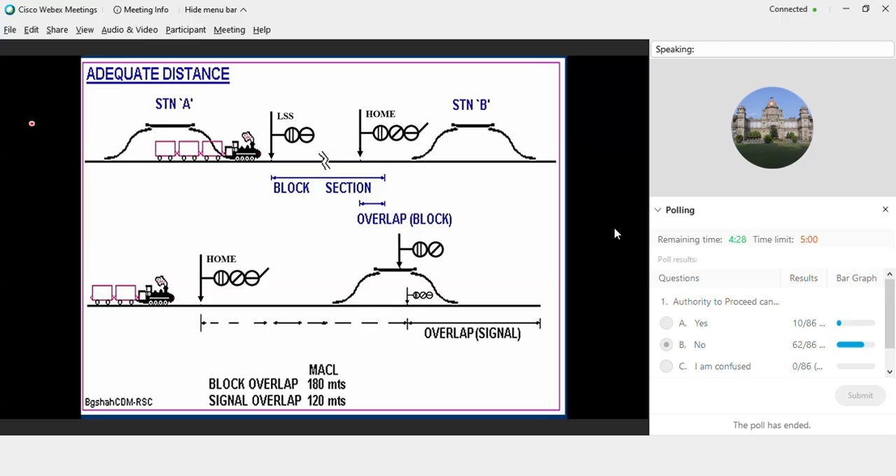to signal. So in that case, the speed is not that much, so the overlap is small. So the signal overlap will always be less than the block overlap. Here is another way of showing it, and there is a small difference in the way the signal overlap is shown in the double line as well as in single line.

In the double line, the signal overlap is from starter to advanced starter. Starter to advanced starter is the signal overlap in case of double line. In case of single line, it is from the outermost point to the advanced starter. This is the difference in the two overlaps.

So, in case of single line, the distance available with the train is much more as compared to the double line. As you can see, the margin available with the train in single line is from outermost trailing point to advanced starter. Now this is signal overlap, so obviously this is 120 meters. So 120 meters plus the length from starter to this point. So it may be around 180, 190 meters.

Whereas in case of double line, it is from the starter to advanced starter, so it is typically 120 meters and not more than that. So there is a difference in the single line and double line.

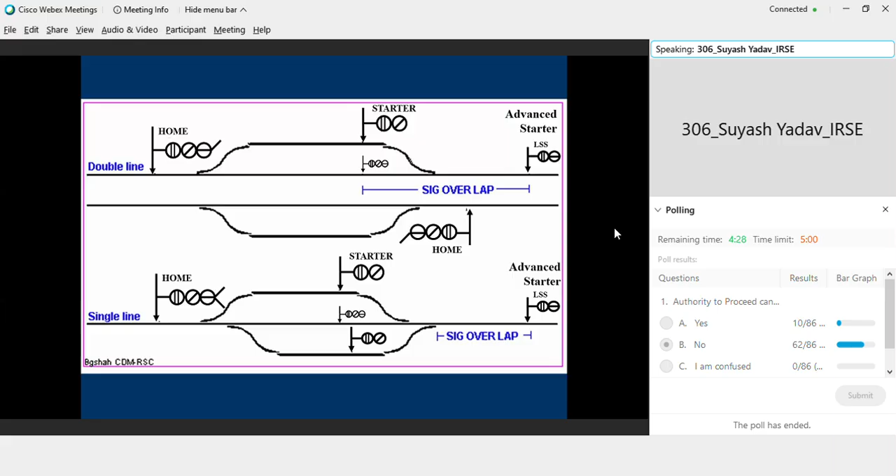Excuse me, so the way... yeah, sir. The signal overlap is from the point to the advanced starter, from starter to advanced starter? In case of double line, it is from starter to advanced starter. But in case of single line, it is from the outermost trailing point to the advanced starter. Thank you. Now the outermost trailing point will be at a distance from the starter signal, so it is always more than 120 meters in case of single line.

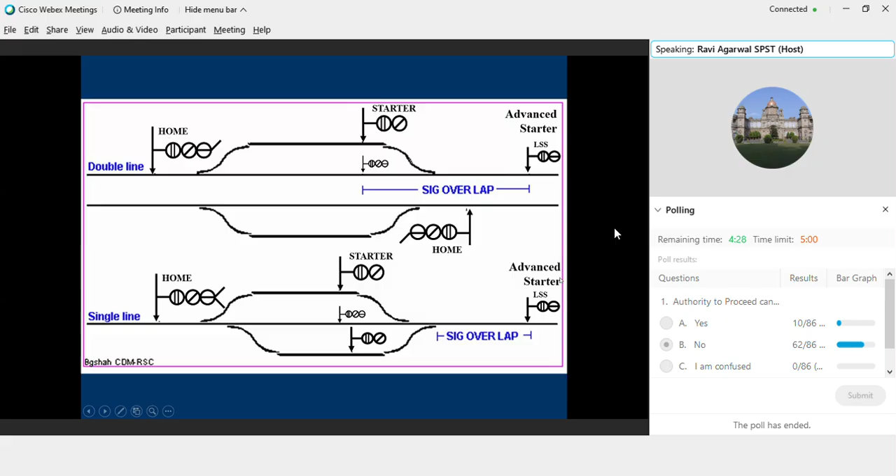Is it okay? Okay, then we'll move ahead. There is a question, I think, so let me try.

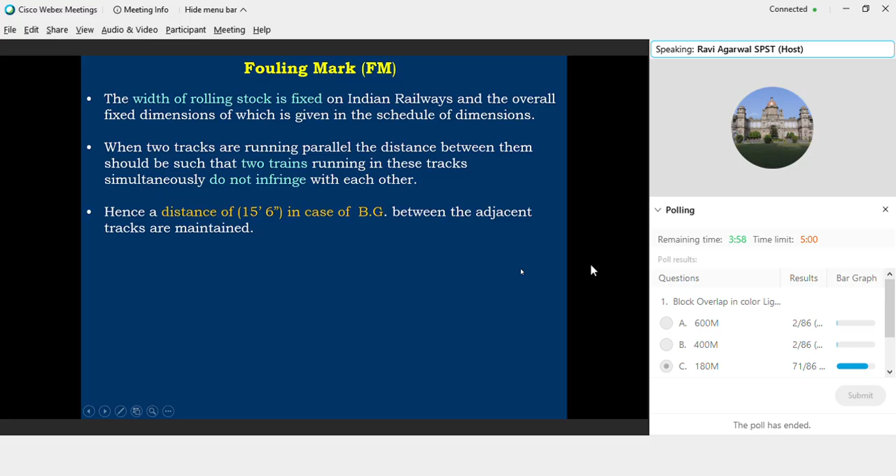Now, most of the places we have broad gauge; the meter gauge is almost eliminated. But in case of meter gauge, the distance is 13 feet. But nowadays we use the 15 feet 6 inches because most of the sections have the broad gauge.

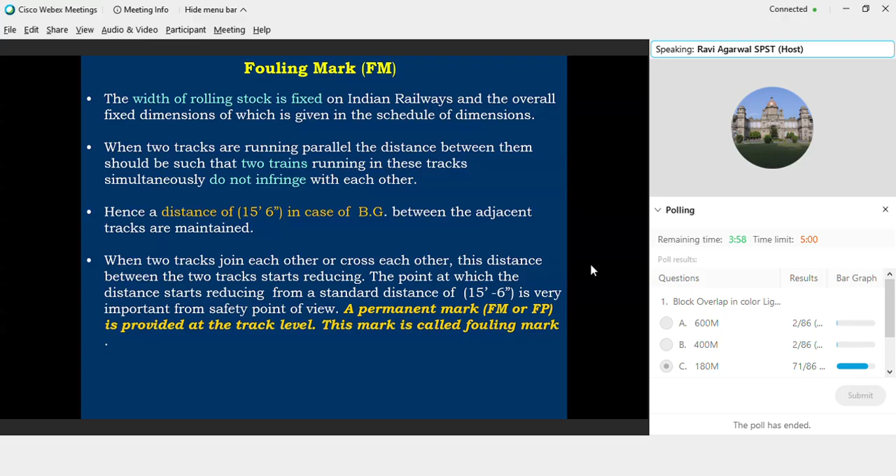So a permanent mark is fixed in the track at this location where the distance between the two tracks is getting lesser than 15 feet 6 inches, to indicate to the driver as well as to the guard of the train that this is the fouling mark, and beyond this point there is an infringement to the other line.

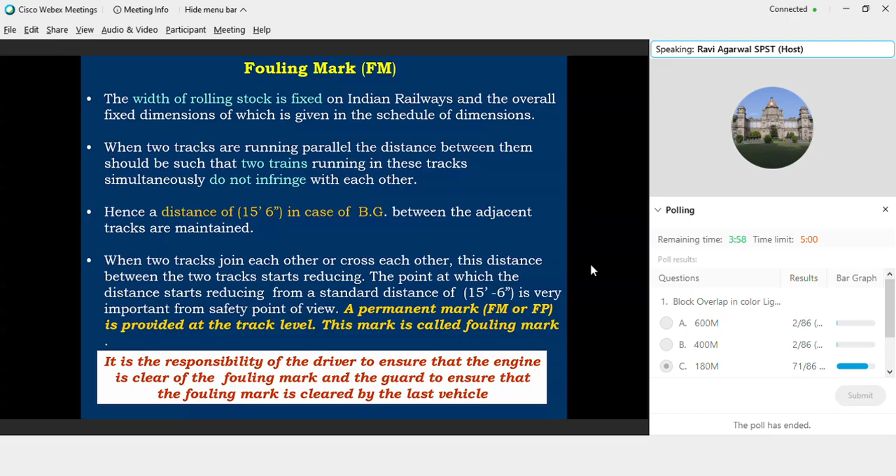So it is for the driver to ensure that the train is standing clear of the fouling mark on the front side, and the guard is to ensure that the train is standing clear of the fouling mark on the rear side. This is how fouling marks are shown on railways, and on railways the full word fouling mark is generally not used, and only the FM which is written is treated as the fouling mark.

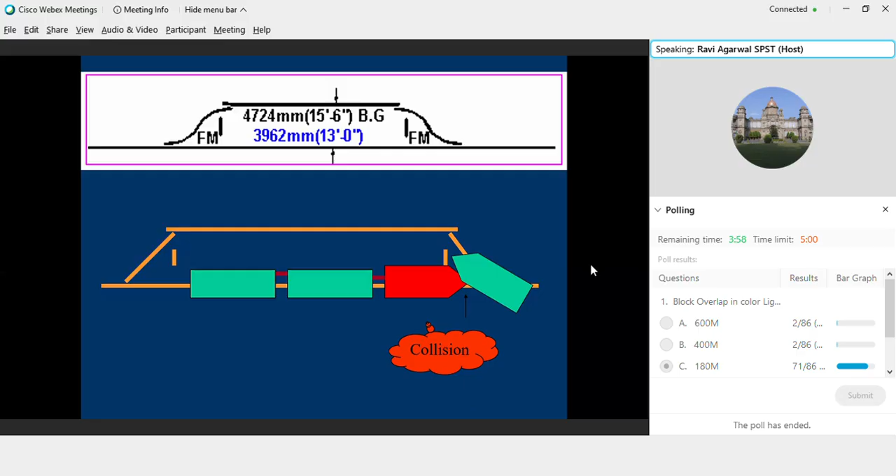Now, suppose a train comes and is standing like this. On the front side, the train is standing away from the fouling mark. The two straight lines shown between the two tracks, the line portion is the fouling mark. So the train is standing there on the main line without clearing the fouling mark in the front, and if the other train passes, because the clearance is not available, there will be some side collision.

Now, in this case, the train in the rear has not cleared the fouling mark, and so similarly, the movement in this way will cause the side collision. And if the train has come in this way, which is clear of the fouling mark on the front side as well as on the rear side, there is absolutely no problem in running of trains on the other line.

So the distance between the two fouling marks is typically also known as clear standing room. It is the room in which a train can stand and is clear from the adjoining line. So this is also typically known as the clear standing room. And nowadays the clear standing room is 715 meters. If it is not observed properly, then this type of collision will result.

And the question for you is, किसकी गलती है, who is at fault, either the driver or the station master? So you may kindly pick up your chat box and write whether it is the mistake of the driver or the mistake of the station master. Please write in the chat box.

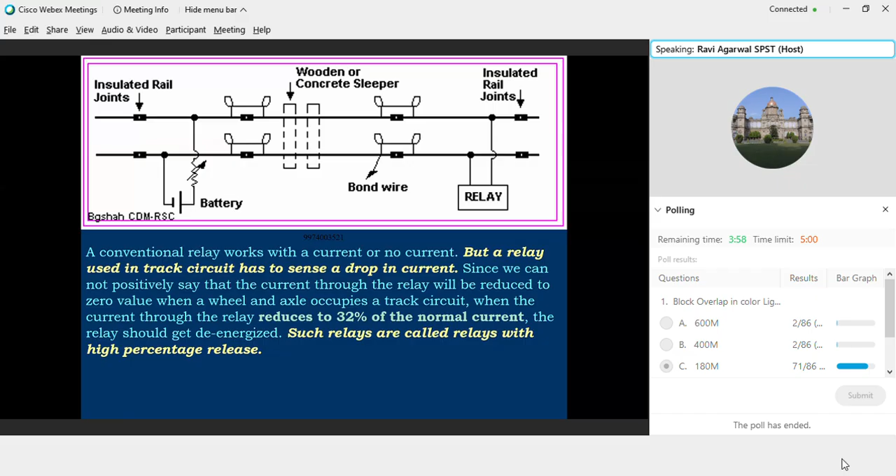So again, the same thing. The relay used in the track circuit is used to sense a drop in the current. So if the current drops to a level where the relay drops, then it is considered as occupation in the track. So we have a question, but we'll come to the question later on.

There is another diagram which shows how the track circuit functions. You can see in the diagram that whatever is fed from the power source reaches the relay. That means there is no occupation. And if it does not reach the relay and the relay gets de-energized, then obviously you have occupation of the track section. This is another way of showing the same thing.

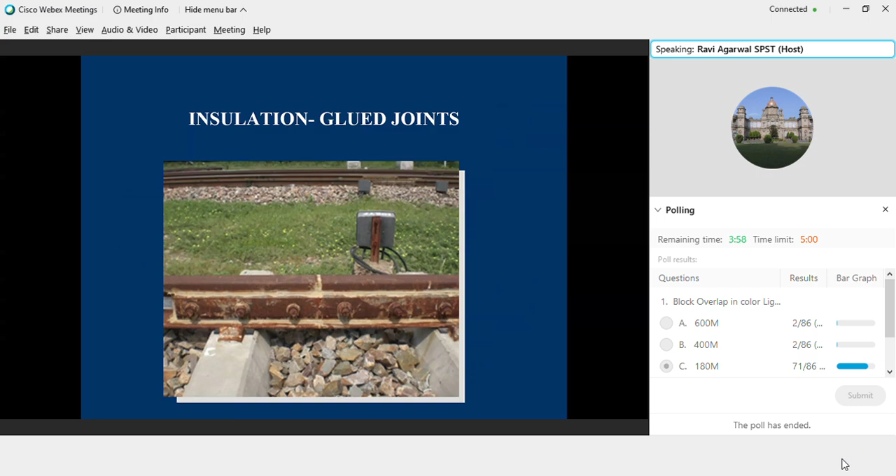So let us go back to the question. We have a question on this. Let me see.

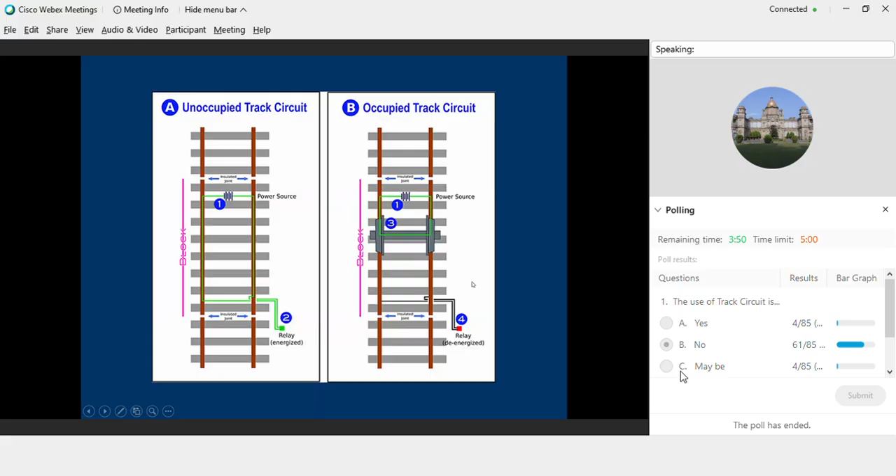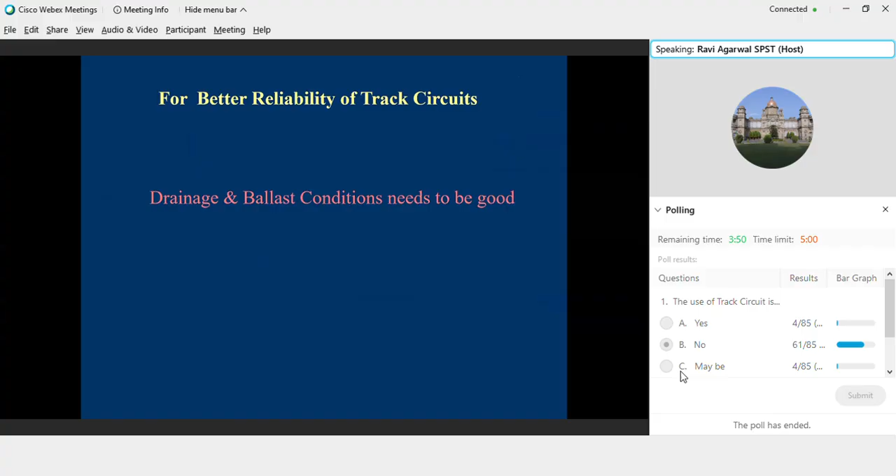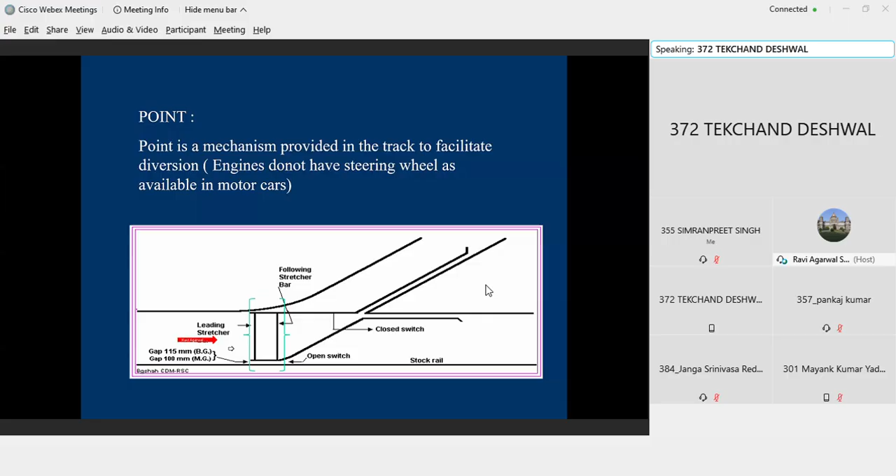So friends, we'll always have to stand in the facing direction to tell what is on the left. Sir, actually your voice is distorting from the past 5 minutes. Your voice is getting distorted. Just a minute.

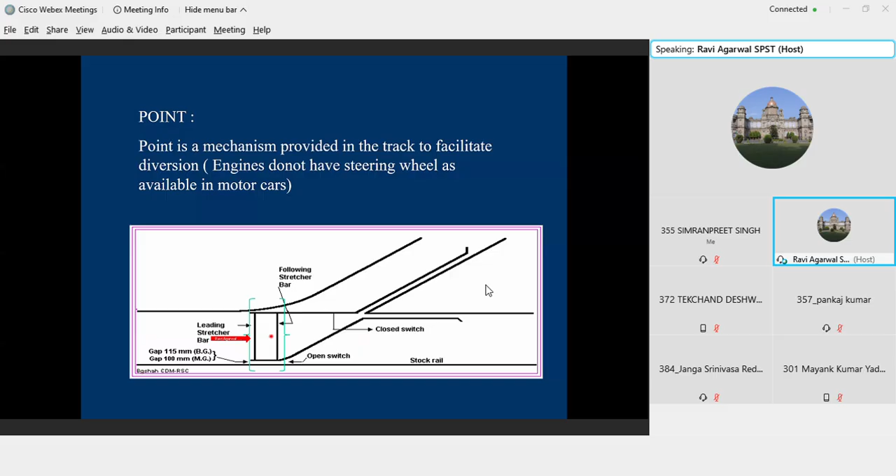So in the trailing direction, the point, even if it is not set properly, no problem. But in the facing direction, not.

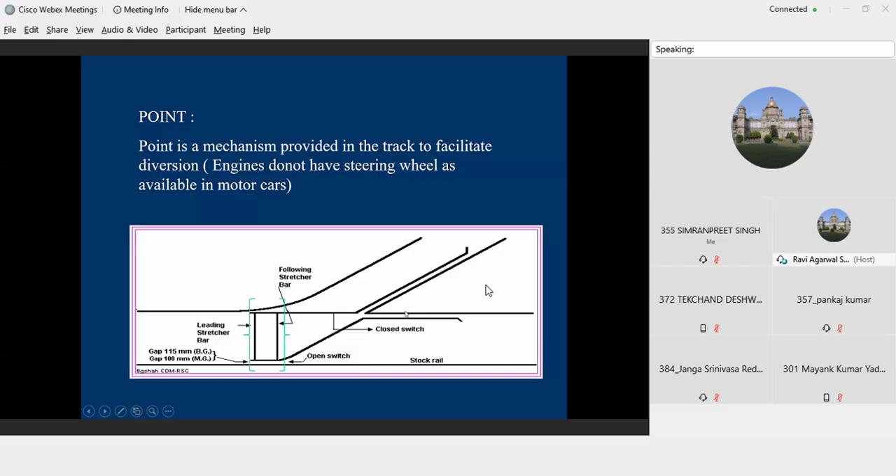So this way we have the facing point as well as the trailing point. The point which causes convergence is called a trailing point, and the point where trains get diverted is the facing point.